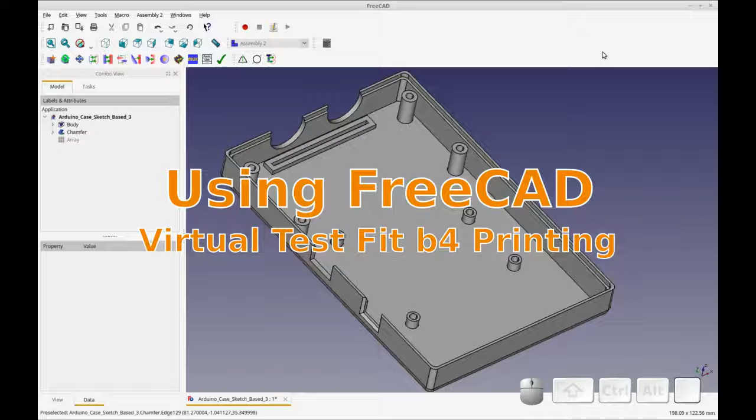Good morning. I'd like to give a brief demonstration of how you can test fit a case design or parts using FreeCAD and the Assembly2 Workbench. So what I have here is an Arduino case I have designed for an LCD, an Arduino, and a rangefinder. And I want to see if the standoffs for the Arduino are even close.

I've measured them and everything. I did these with hand measurements, so you know how fiddly they can be. So I've opened my sketch, and what I want to do is use the Assembly2 Workbench to add an Arduino to this drawing.

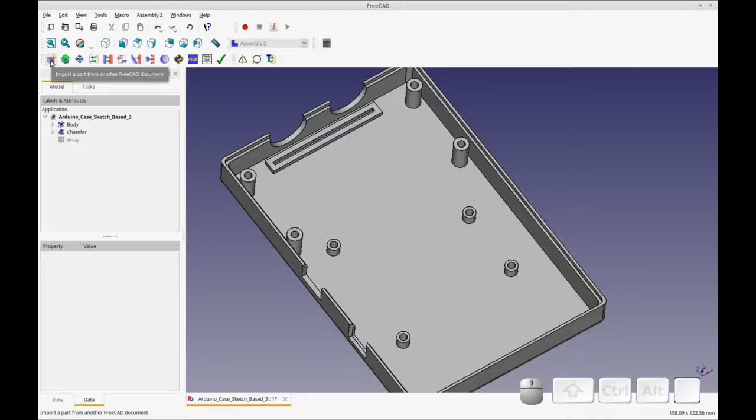So I'm going to add a part, and then it asks me what part I want to import. Now I've downloaded this step file from a drawing on the internet, a really good one by the way, and I'll try to include where I got it from in the description, although I think I've lost that information, but I'll try to find it.

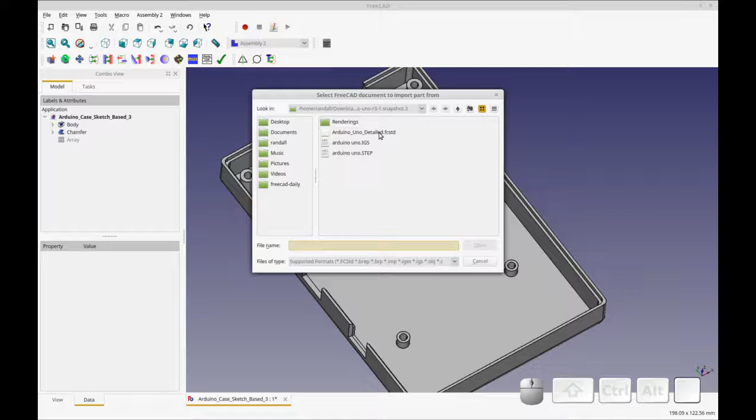So what I did is I took the step file and imported it into FreeCAD, made it compound, and then saved it as a FreeCAD drawing, and maybe I'll show you how to do that at the end. So anyway, here's the Arduino Uno.

Okay, so I paused the video while it was working. My FreeCAD is kind of slow. I'm on an old computer.

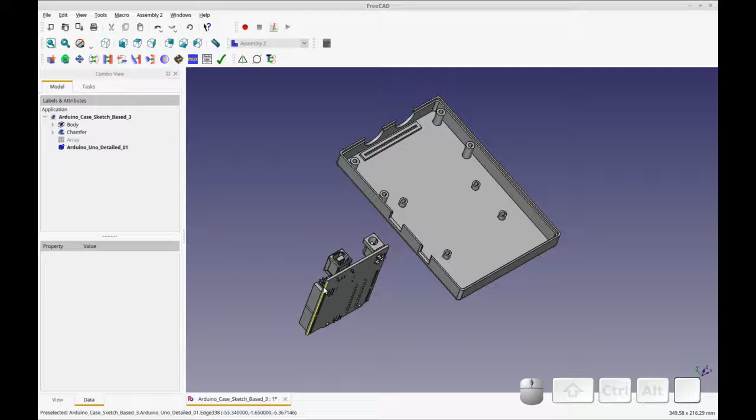Now, previous versions of the Assembly Workbench, I thought would give you the opportunity to rotate and move this when you brought it in, but I guess not, maybe not anymore. So let's try to trigger a recalc here. So it's marked to recompute.

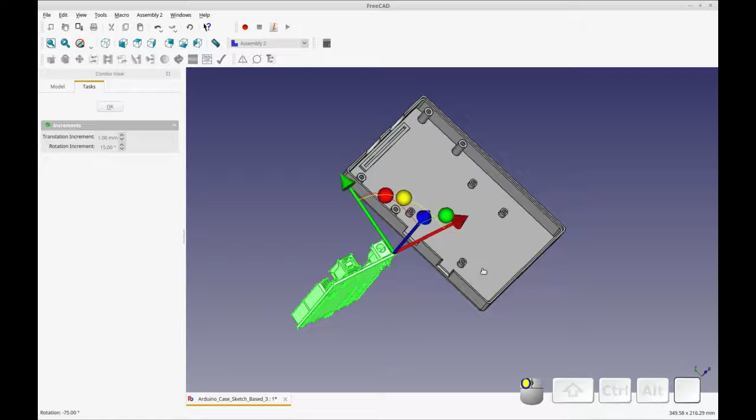Anyway, the first thing I'm going to do is transform this and rotate it in the direction I want. I like to, for non-critical stuff, use the transform tool instead of getting into the data sheet, the data tab on the combo view. So that's as much as I'm going to do, because now I want to show you how to do the snap part.

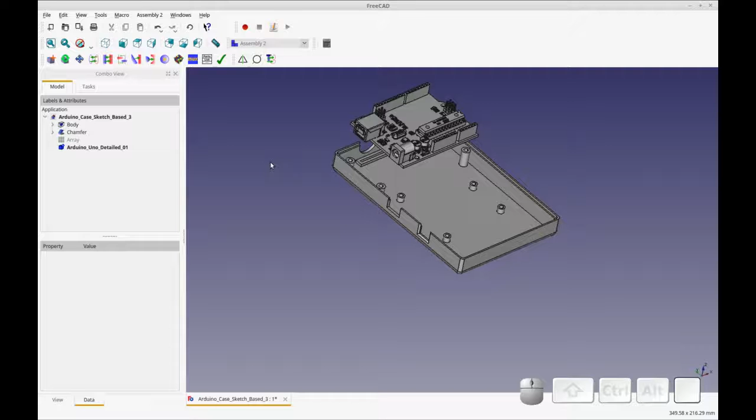So I've got my Arduino model and I've got my case. Now that I've got my Arduino positioned the way I want, I'm going to add a constraint, a circular edge constraint. My guess is that this just invokes the draft constraints, but it's just a little bit more intuitive. It takes some of the parts out of it for you.

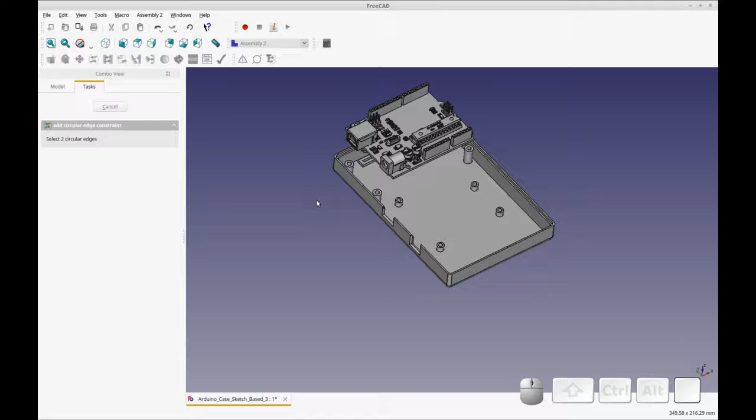So now the first item you select is what you want to move. You'll see how I selected the case first, and it tried to move the case. So I want to select the whole edge of one of the holes of the Arduino. Okay, so that's a circular edge, and then I'm going to pick another circular edge, and you'll see it just moved the Arduino into place for me.

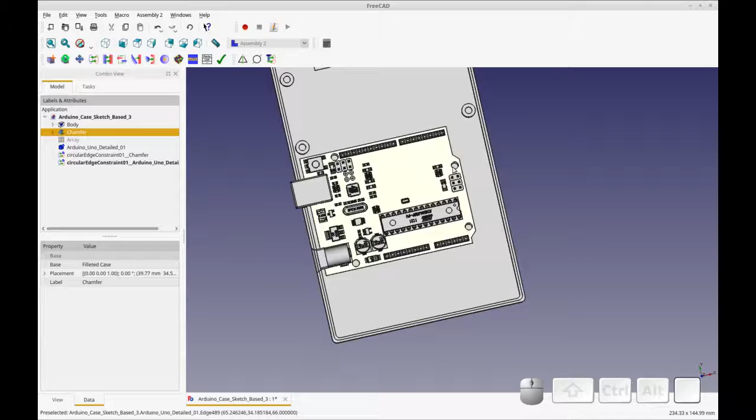And now I can check to see how well I did with the measurements, and you can see I'm off a little bit. This one's dead on, but these are off just a tiny bit. So that'd be something I would want to correct.

Then the next things I would do is my test fit for my LCD and my rangefinder. And thank you for watching.